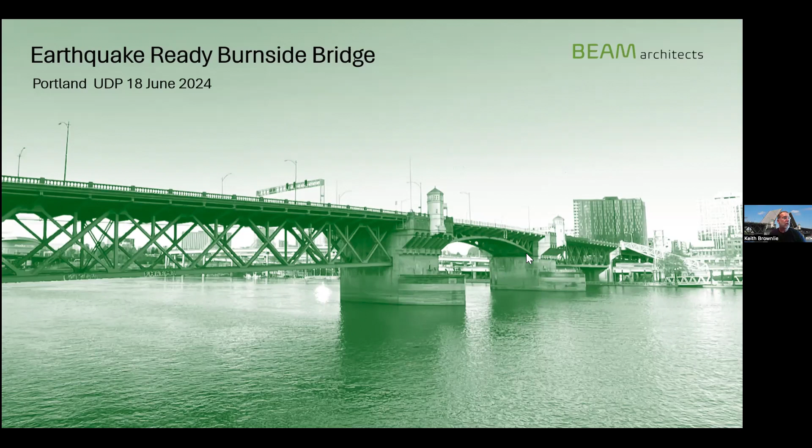So without further ado, the CDAG's focus has largely been about the east side span. There are 2 reasons for that. Irrespective of what happens on the east, largely the rest of the bridge is the same or similar, and also the long span bridge is visually the most significant aspect. It will be the piece that defines if someone in later years says, 'Oh, the Burnside,' and everybody will say, 'Yeah, the one with the,' but the 'the' is yet to be determined. We've done a lot of work, and there are still options on the table, and there's a process that will be explained about how to get your opinion on those.

I'm just going to take you through where we're at. Nothing has changed insofar as those 2 generic types: a cable-stayed bridge at top, or a tied arch bridge at the bottom. I'm going to go into ideas of scale and architectural niceties, and not-so niceties that go with that, but note the scale differential. I'll come back to it.

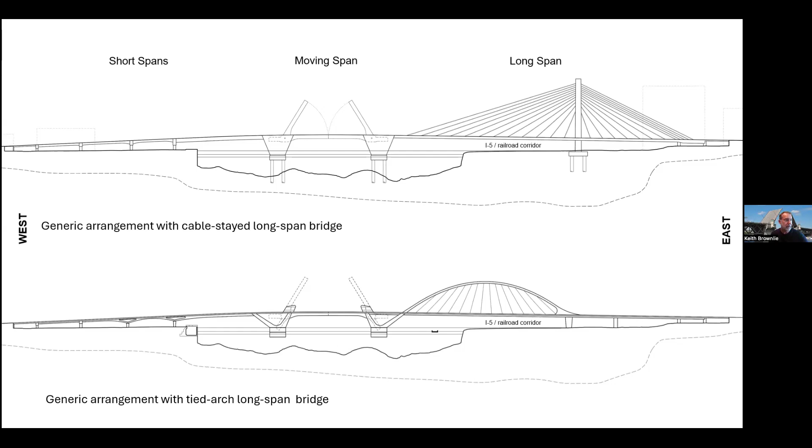This slide was designed for that other forum inhabited by non-professionals and non-construction professionals, just to get some technical input into the difference between those 2 types. They are very different—they do the same job, but they're very different pieces of structure. A cable-stayed bridge involves a singular point of structure, a tower or mast, from which cables are strung to support a deck. That deck is in compression, the tower is in compression, the cable stays are in tension.

Conversely, a tied arch differentiates itself from a thrust arch, where in a thrust arch all the load goes down to ground. In a tied arch, a bowstring arch, that load is resolved through the deck—it's literally like a bow. It's got an arch rib in compression and a deck in tension, and the deck is suspended between. So they have very different structural outcomes, and the key takeaway is that the arches rest much more heavily on the in-water pier, whereas with the tower, nearly all the load goes down to terra firma—at least it would, if we had any terra firma. We have terra not very firma, because it's within the liquefaction zone of that side of the Willamette.

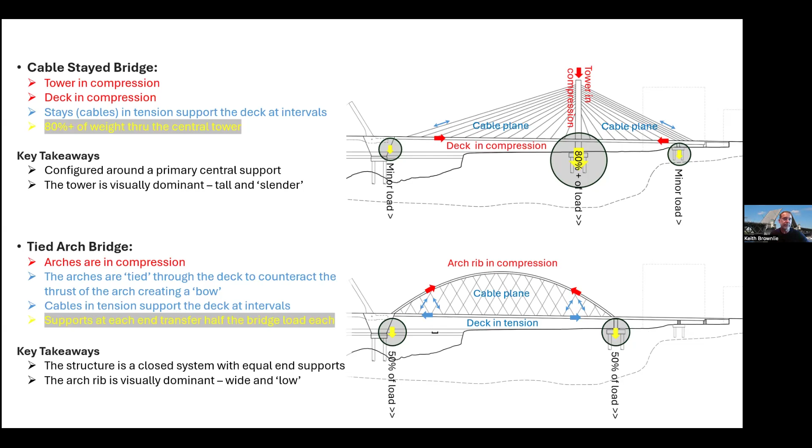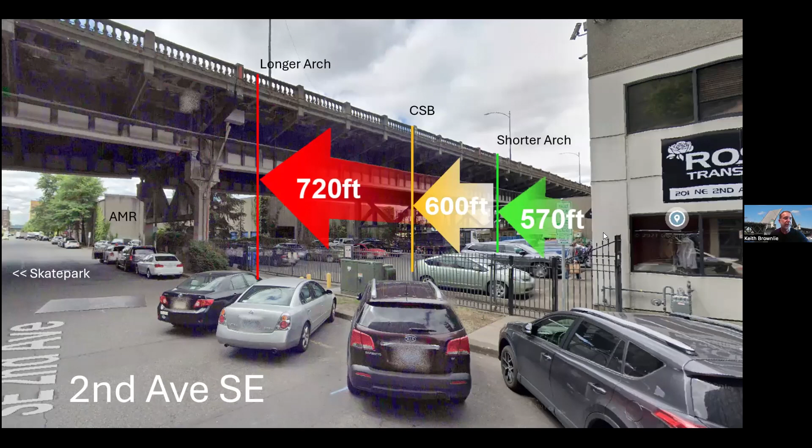So it's a deep foundation. That said, I'm going to come back to this, but just so you know—you're probably all very familiar with the site—this is looking south on Second Avenue Southeast.

Ignore the large red arrow in the foreground. The cable-stayed tower will be somewhere in and around this 600 feet zone, and the arches will be in and around this 570. The skate park's off to the left-hand side, and just down to the right would be the Union Pacific Railroad and I-5 corridor. But within that hinterland, that's where the bridge lands on its east side.

This is the AMR down here. I'll come back to it, because there are some other iterations that are slightly longer, which is why it says longer arch—I'll show you those. So the generic types: cable stay, tied arch. The more specific types within those generic ones are labeled out here.

I'll come back to show you those in more detail, but there are 3 types of each. Essentially they're the same thing, but there's a great difference in profile, little difference in construction methodologies, and a little difference in cost, but these are all still very much on the table. So you have the goalpost tower on the top left, the same thing but with those towers leaning out in the middle, and then an inverted Y configuration with the top of the tower over the center of the highway on the top right. In all 3 cases, the arches are on the outside of the deck, a pair of arches, either vertical with no bracing, leaning in with bracing, or vertical with bracing. Those are the generic typologies.

I mentioned earlier, let me go backwards to that last slide you saw. The difference here, these are looking east, so you see there's a pair of piers in these 2 scenarios. But these 2 types in particular, within the reachable cost range, could knock out this foreground pier and just have the pier just to the west of Second Avenue. So that red arrow on the earlier slide that I asked you to ignore, I hope you didn't, because that's where the longer ones land just shy of Second Avenue Southeast.

Why does it matter? Well, it probably doesn't, but that 50 feet extra length of span equates, if you're using the same aspect ratio, to 20 feet additional height. I'll show you later, but essentially there's a discussion about scale in the city, which you'll all be very much aware of. It's not to say we can't make the arches at any length 20 feet higher, it's just that that's what would happen if you lengthened it. Personally, I think there's not very much value in doing that.

So here's some words you probably use all the time. These words went to the CDEG with an explainer, and that explainer probably complicated rather than simplified or clarified things. But in essence, these are some, but perhaps not all, of the architectural and urban design discussions. There are other ones about cost, constructability, schedule, seismic resilience, and so on. But from a design perspective, these are some of the things we're looking at.

The list is designed to do 2 things. One is to say it's not as simple as looking at 6 options and saying I like that one, because they do not respond to all of these criteria in the same way. Some may have a more urbane response to some views, for example, while others might rise to the top in others. So there's a complexity within it. That's point one. The second point is that this list started life just to make my first point, but seems to have evolved into being one of the questions going into the online open house.

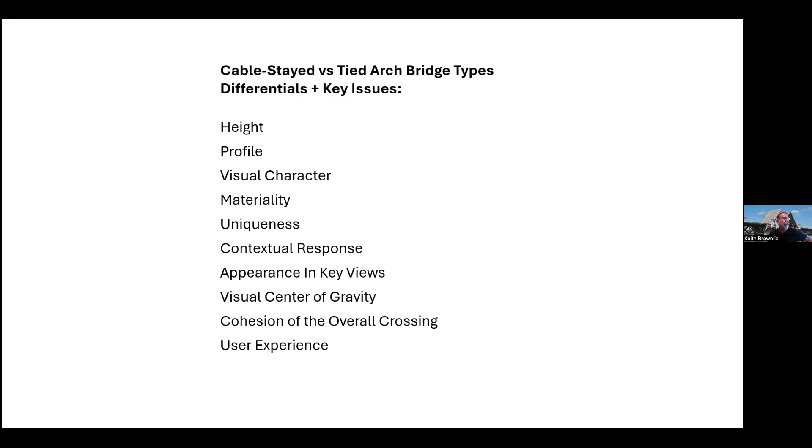So these words, which you will understand, it's my belief they are going to go in some respect to the public, so it's worth holding that in mind. I won't run through all of those, but some are self-explanatory while others merit a bit more drilling down into. The first one, I've got a banner across the top so I don't know what it says, even though I wrote it. It probably says height. Let me see if I can move it. I can't.

This is a large structure, and it's a large structure not only in the city, but absolutely on the pivotal spine of the city, so it will have an impact. The very kind of analog analysis of this says, well, look, cable-stayed bridge towers are by definition taller. So we're looking at something like 290 feet above the ground, and about 130 feet for the arch. But if you add that 20 feet in for the longer version, maybe 150 feet.

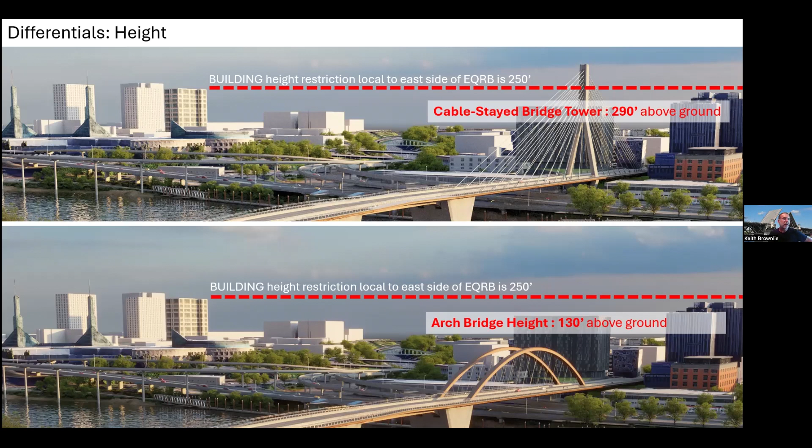We're using that metric above ground rather than above a datum, just to give you some kind of local context from these tall buildings that anchor the east of the site, but also to give you height context. The cable-stayed bridge, for example, at around 290 feet, and who knows, it might be 270, it might be 290, but there's an efficiency game to play. So the variation is about making it work in an optimal sense rather than an architectural want.

But I'm kind of interested in the steel bridge very close by, 260 feet, 290 feet, so we're just poking our head above that particular parapet. You're familiar with all of those structures, and I suppose in psychological terms the Tilikum would be the most comparable. That 180 feet, I think, is from the ground. So just as a comparator, we're a much taller structure because we're a much longer structure, but we have one tower only. Most cable-stayed bridges would have two towers, as the Tilikum does.

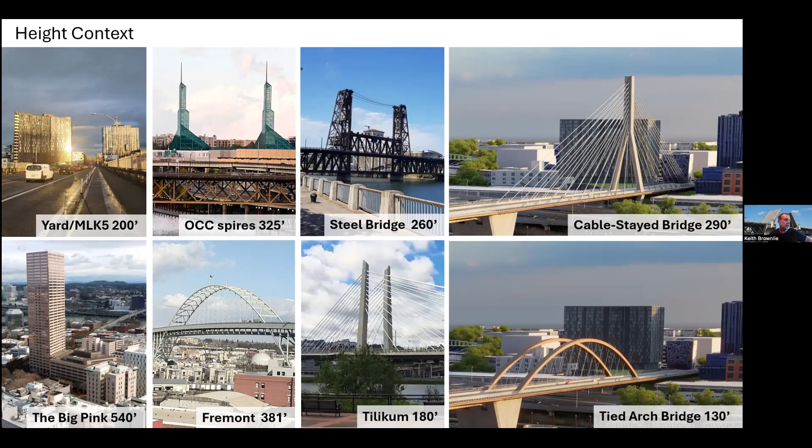So another differential is materiality, and this is essentially a given. So the cable-stayed tower will be a concrete construction, and all of the arch versions will be a weathering steel construction. Just to add in that the deck superstructure, the framing of the deck, will also be weathering steel. So the arch versions are a kind of matching suit of weathering steel, and the cable-stayed bridge will be a compendium of materials, but certainly that standout piece in the tower will be concrete.

And you'll all know that comes with baggage. It comes with a considerable onus on the weathering steel side to detail it to avoid rust spillage onto other surfaces. So waterproof detailing is hyper important. And on the lighting side, obviously weathering steel is a matte finish, so ambitions for architectural lighting need to be considered quite carefully, because the absorbency is higher, the reflectivity is much lower, and so on.

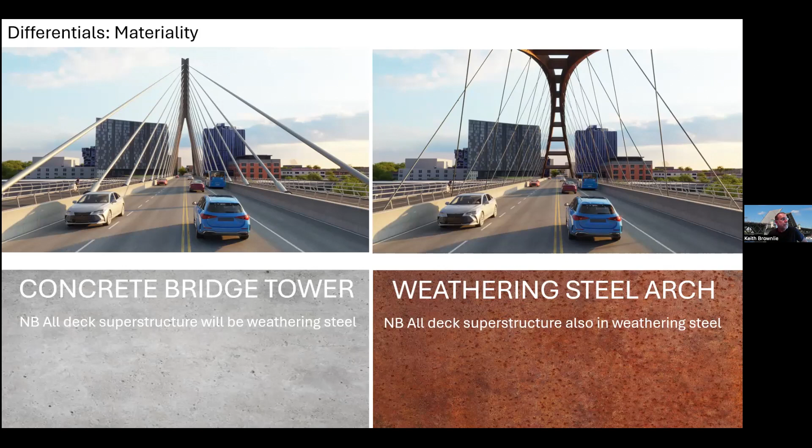Another differential, well, this is not between the cable stay and arch pieces per se, but it is between the subtypes. I don't know whether it's important to you. I don't actually know whether it's even important to me, but bridges are a very, very constrained typology. The first thing we ever have to do on a project when someone says this must be unique is gently explain that it's not going to happen, because there are only 6 bridge types and a limited number of subtypes within each. So it's a limited pool.

But of course, in the context of any city, what you're trying to do is make it the best fit within the urban context. So do you want a unique structure in Portland is a credible question. Do you want a unique structure is not a credible question. Obviously, the goalpost tower you already have. That's what the Tilikum is, albeit there are 2 sets of goalpost towers, but you already have one. You know what it looks like. The inverted, well, oh no, sorry. The labels on the diagrams are above, and confusingly, the photographs are labeled below, just to keep me on my toes.

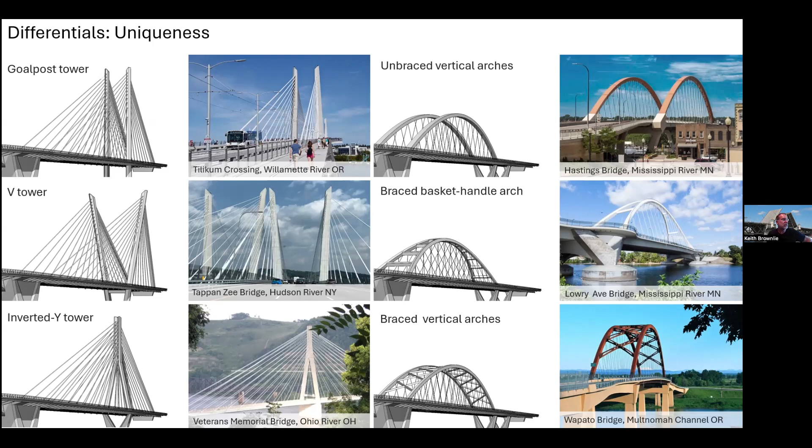So this, I think, is important. The two bridge types are spanning exactly the same length, within a few feet, and they're spanning the same obstacles. They're spanning the I-5, the railroad corridor, connecting back into the land, and stretching out to reach the first in-water pier over the river. But you can see there on the left-hand side how very different they appear in the landscape.

So in this view, Burnside is on a bend in the river, and it straightens up as it goes to the north. So if you're looking south from the centre of any of those bridges, from Fremont or Broadway or Steel, you see the cable stay bridge, bottom left. You see the tower over the land. You don't see the centre of the river bridge; you see a land bridge. So that scenario really draws your eye eastwards, whereas the arch draws your eye westwards.

So if you then concentrate on the two images on the right, the arch ribs reach in and connect very visibly, because the arch rib is a horizontal, albeit curvilinear, form, and the cable stay is a vertical form that's recessed very far east, and the only thing that connects into the river is the cable plane. Those cables are very thin relative to an arch rib, and they're very far apart. So they have legibility, but also transparency.

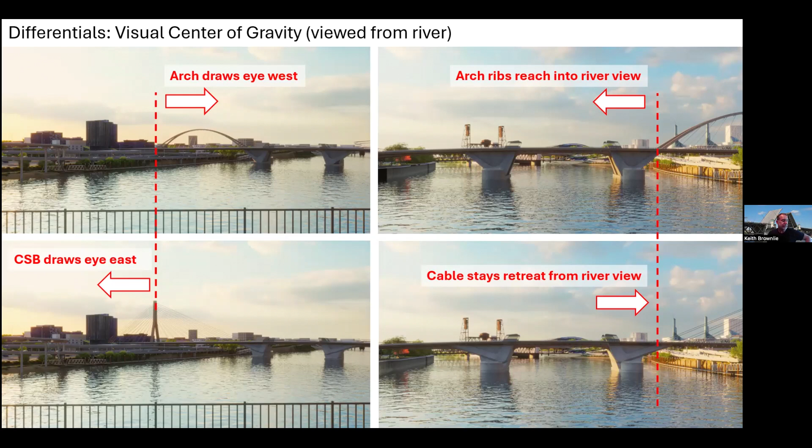And what's happening over the land is this. So, to put my cards on the table, I think the arch rib reaching into the in-water pier is a challenge visually, but it redeems itself as a type in this scenario. So I-5: the images on the right are running north on I-5, and the images on the left are running down the on-ramp onto the southward highway.

But you can see that the arch addresses the highway corridor. It says, "I am a bridge of the land," and okay, it reaches out over the river, but its center of visual mass, its center of gravity, is over the highway. I think these images are taken a little high, but from the driver's point of view, you have almost no cognition of the river in that position. You're just looking down the highway, and this bridge addresses that. I'm not saying that the cable stay doesn't, but it's a much more subtle reaction to the highway.

Whether, of course, that is the right place for a gateway structure, which the arch most certainly is, is a debate. But my take on it is this: it's not a gateway from one place to another. It's a marker for what is the pivotal spine of Portland. So as you come under it, you can't fail to notice that you're passing under the Broadway, the Burnside corridor.

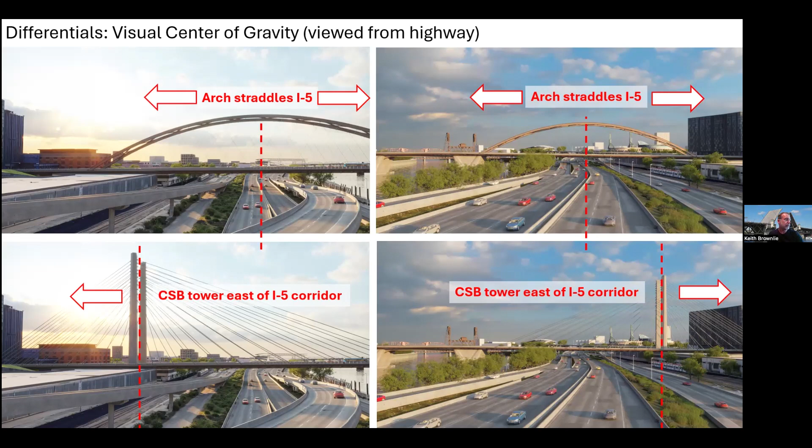Well, interestingly, I don't know what that says at the top because I have a band in front of it, and I wasn't expecting to see this image, but I think maybe there's going to be a red line. Yes, here we go. Look at that beautiful red line.

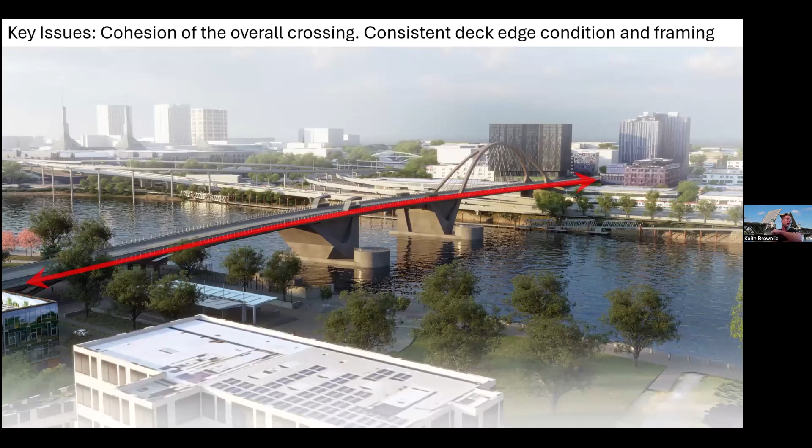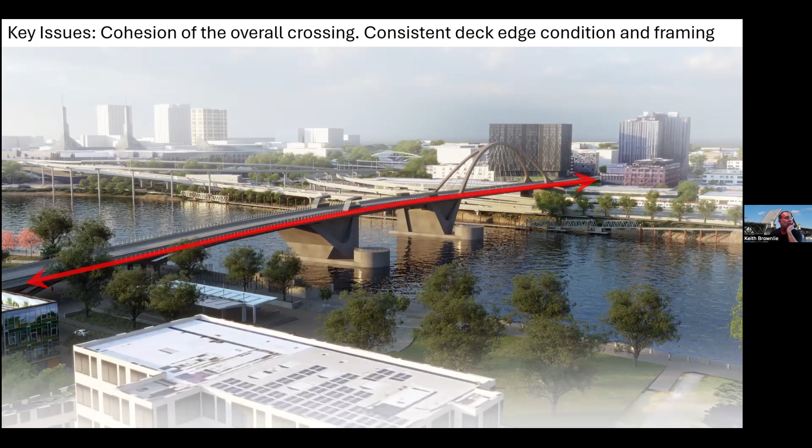So this is a key issue rather than a differentiator between the types or the subtypes, but on all types, one thing that we're trying hard to achieve, relative to the status quo when we arrived on the project, is to bind those three parts, the east long-span bridge, the river bridge, and the western approaches, together by continuity of deck edge. It's absolutely critical that edge is continuous and cohesive. It currently is, which I find very interesting.

In modern bridges, with apologies to all the engineers on the call, bridge engineers tend to want to put the longitudinal structure as close to the edge as possible, and then have the cantilever as small as possible. But what that gives you is a very thick edge, a very thick visual component that defines the bridge. Whereas if you recess the longitudinal structure as far back as you can and cantilever the footway, in our case the bike and footway, you get a thin edge.

And you do read the foreground edge much more. These aren't the best images to say what I'm about to say, but recessing the longitudinal structure into shadow is an immensely powerful device. So currently you have consistent framing end to end on the Burnside, and we aim to replicate that.

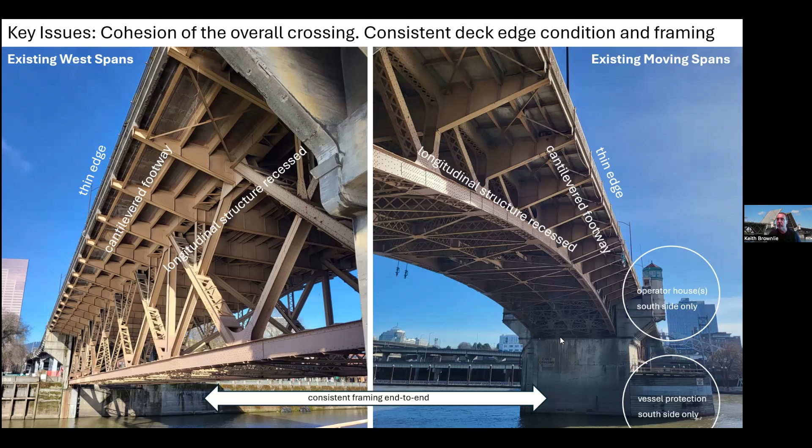There are another couple of things, as you can see down there on the bottom right. We have two operator houses on the south, one on the southeast, one on the southwest, either side of the moving bridge. And we have vessel protection on this side only. Both of those things on the existing bridge need to be replicated on the proposed bridge. We don't know what those are yet. We've designed our way around that particular debate very many times. So take these as placeholders.

There will be something on the south side in front of the in-water piers that stops vessels hitting the bridge. It's a strange anomaly of the language of bridge design, but also the attitude of mariners, that these are not to protect the bridge from the vessel, they're to protect the vessel from the bridge. So these are vessel protection.

The other thing here, what you don't see, is the operator houses on the outside. We don't yet know whether they will be or not, but our ambition is to take them inboard so that we can maintain the continuity of the deck edge, the continuity of the framing with the cantilevered footway and the thin edge, as opposed to the thick edge of a longitudinal structure, uninterrupted by the op houses. We'll see.

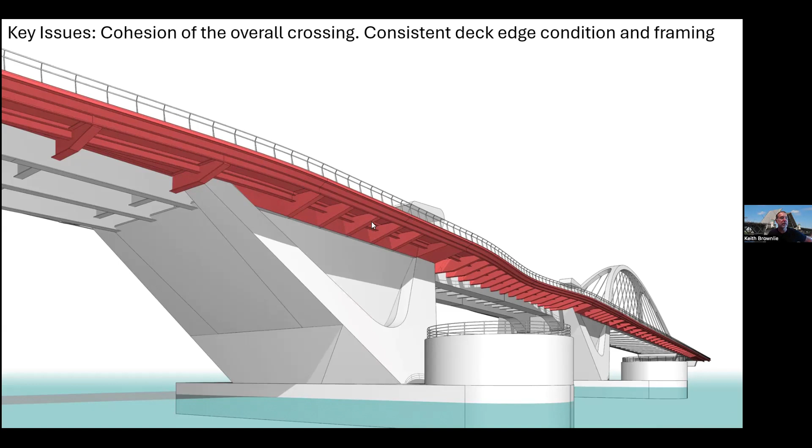So we are back to these types, which I described in rather scant detail previously. But I mean, 9/10 of bridge architecture is profile, and these all have a different profile. Well, they all have a different profile depending on where you're standing.

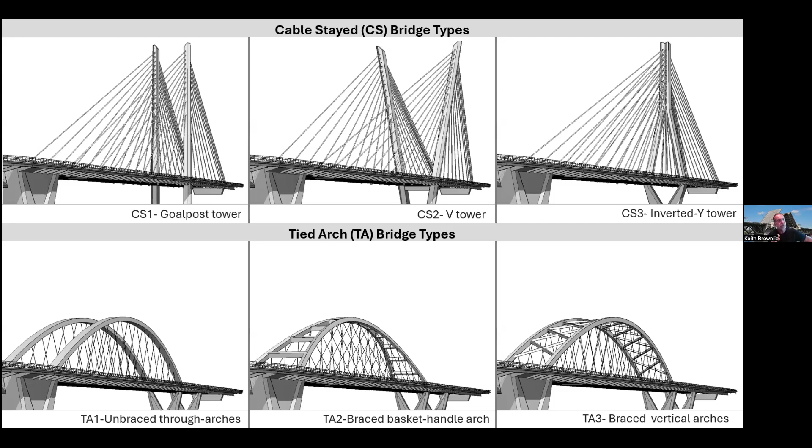So we have a relatively sophisticated CGI model. We are currently running some video of these types from those. Those are not ready yet, but they will form part of the online material. But what I can show you is these 6 options from various strategic viewpoints. You can make your own mind up what you think has power and whether the volume dial is turned up too high or too low on these particular options.

So obviously the scale differential is the most immediate thing to notice, and perhaps actually the lack of difference from very many viewpoints of the arches. They are very similar. Whereas kicking a cable-stayed tower by a few degrees of inclination makes a significant difference to its demeanor.

So this is a view that none of you will ever get, I'm guessing, but as an overview. One of the things to note on this, incidentally, is how the big pink sits just off of that corridor. One thing I quite like about the cable-stayed versions is that there is this conversation, this kind of bookending. Previously perhaps the Yard and MLK5 would have done that bookending, but there is also a kind of interim conversation between the cable-stayed towers and the big pink, which doesn't occur in the arch versions.

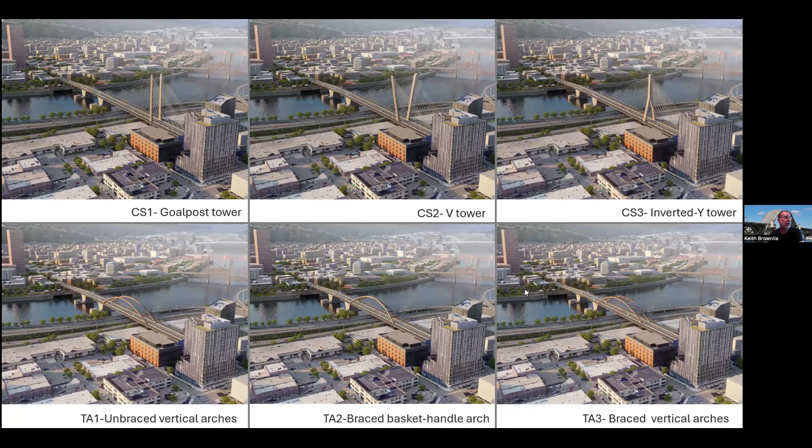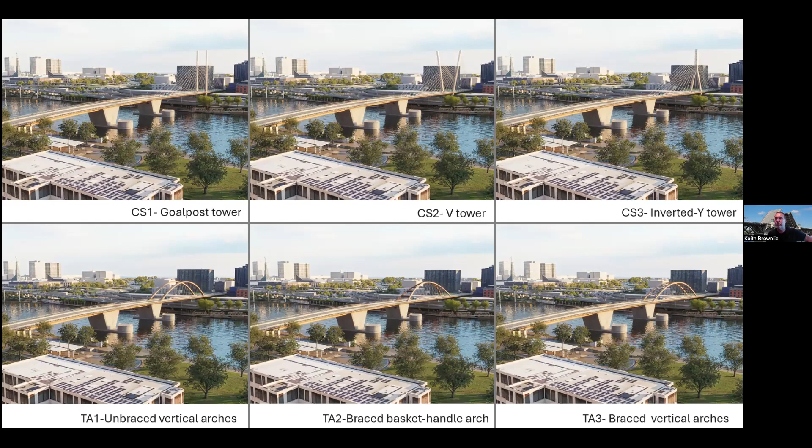So there is also a relatively unachievable view. There might be some buildings here, but unless your office window's there, you're not going to see it. But from this side of the town, and we'll drop down a little bit more to have a look, you can start to see that it doesn't matter what you put on the east, or well, it does matter, but its significance is lesser than what's in the foreground, because by virtue of having these two bascule lifting decks, you have very significant in-water piers that define the foreground, and whatever you have in the background is relatively light, despite its scale.

So this is from Tom McCall Waterfront Park. The bridge, obviously, in each case, spins off to the left-hand side across the park and into Old Town. Depending on your viewpoint, there is a sort of scale from boring to exciting, or choose your own adjectives. Or perhaps it's a question of politeness in the urban context.

I'll leave these up for slightly longer than I'll talk, because you need to take them in, but we can come back to them in a Q&A. There are 6 or 7, and we're only 3 or 4 from the end.

So here we are at I-5 again. I've said, I think, all I need to say about the difference between the cable-stay and the arch versions, but I'll also point out that, choose an arch, any arch, and they're largely indistinguishable from these profile views, whereas you do continue to notice the difference in the cable-stay tower layouts.

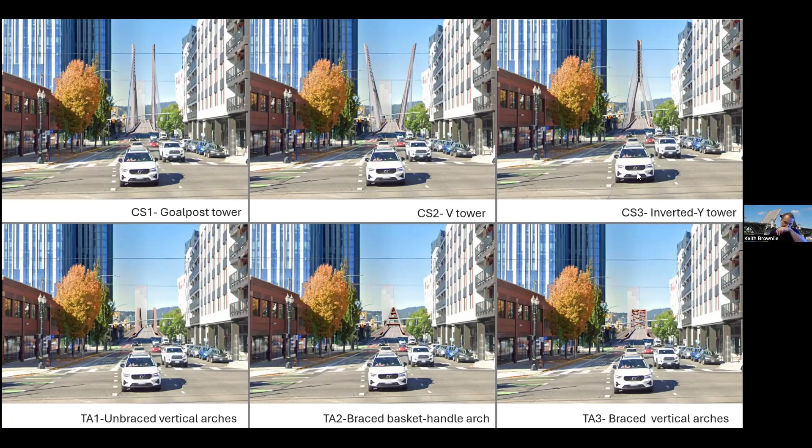And there is the last slide. I'm under some heat for not being entirely fair by ending on what I would say was an architectural preference. But I had to end on something. I think it's rather a good image. But I'll tell you what's wrong with it. These barriers, which are concrete, are not correct. Those will be open steel, three lines of structure, open, so have a much more airy, light feel. So I don't know how long I've taken. I don't know whether I've explained it well, but the floor is yours.

Well, thanks, Keith, for that presentation. We've got about 15 minutes left, and we've got a few questions we can lead off with in discussion. If you think of any, put them in the chat, and we'll get them on in the dialogue here. Fiona leads off with a question about the design review process in addition to the CDAG. Does this go through the City, Portland Design Commission, or other bodies of review? And then Megan. Yeah, I can take that one.

So the process is essentially we will be working through July to gather input and feedback from the public on this range. We will be taking that feedback back to our Community Design Advisory Group. They will consider that feedback as they make their recommendation on bridge type in August. We also will be sharing with that advisory group all the feedback we've heard in our briefings. So this is an example of a briefing. And then the recommendation from the Community Design Advisory Group would go to the project team, which is balancing a number of criteria as we march towards making a decision.

So it's a mixture of community input on bridge aesthetics, cost, schedule, risk, impacts to stakeholders. We'll be taking all that into consideration when we make a recommendation to the Board of County Commissioners, and ultimately the Board of County Commissioners will decide, and there is opportunity for public testimony at those board meetings. So that's the process we have laid out in a nutshell. Okay.

Thank you, Megan. We've got a question. I think you started to address it in the slide. Keith, how much importance do you give to the experience in crossing the bridge to vehicular, bike, or foot? So the differences in modes. And the question is an anticipated animation with that view in mind?

Do you want me to take this one, Keith? Or I do. I want you to do all the work from now on, James. Okay, fair enough. So yeah, well, we are thinking about the experience for all bridge users, whether you're on the bus, in a car, on a bike, or as a pedestrian.

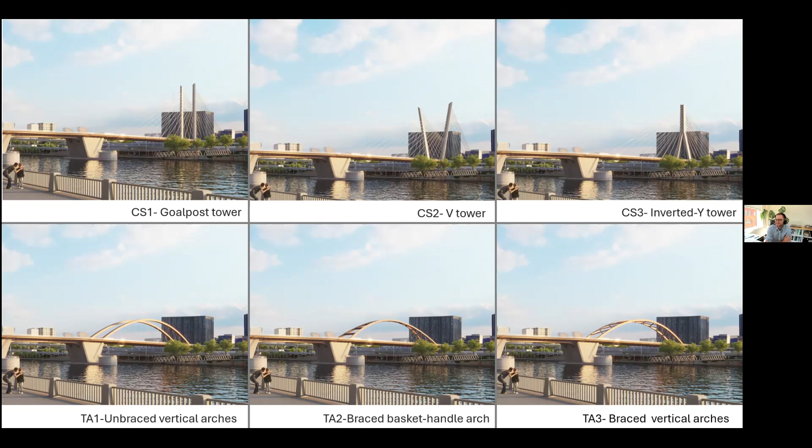Continuing on, I think Megan, you had addressed this, but I think the question is if there's no center median planned. And I think a lot of it has to do with the cross-sectional demands of the bridge and the width and cost. I don't know if there's any specific follow-up on that.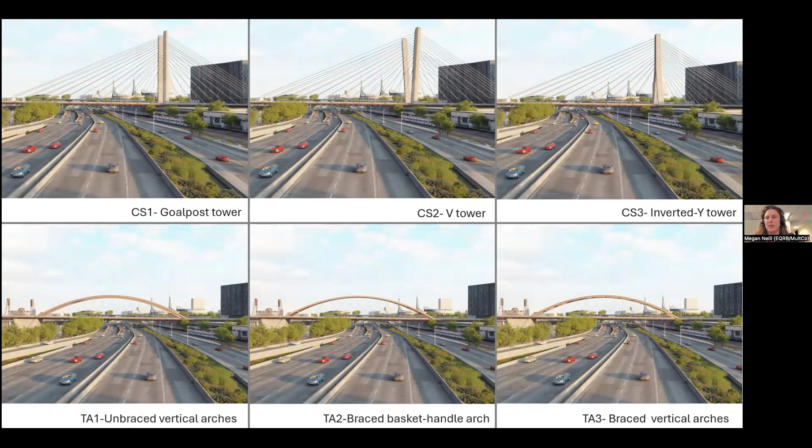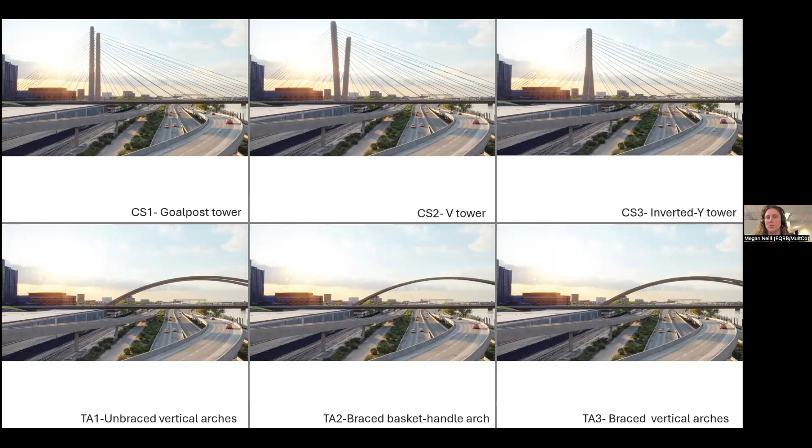Just that we want to make sure the deck is as flexible as possible for any future use, or sometimes when you do some temporary work, you need to close a lane and divert people to adjacent lanes. So having a barrier there would really limit that flexibility. So we just want to ensure that we're not encumbering any use of the bridge in the future.

Thanks. And then also following up on that was a different question, but thoughts about bridge lighting. It's a thematic element in our city. And is there any considerations? I know, Keith, you mentioned the different bridge surfaces are going to reflect or not reflect differently, but is that to come, or is there thoughts incorporated in the process so far?

So we are definitely going to be thinking about bridge lighting. As it stands at the moment, that process hasn't really begun, although having said that, we are thinking about how we integrate the lighting that we know will be there, the functional lighting on the bridge. So we know we're going to have light poles. They're not on these images yet, but they are in process.

And one of the things that we're quite keen to do, Keith talked about the continuity of the deck edge. What we don't want to do is have light poles on bump outs on the outside of the bridge, because for us, it's about the line of that trajectory of the outside of the bridge, and light poles will start to break that up.

So we're keen to push the light poles into the median between the highway and the cycleway by making that curb slightly wider. And what that will do is, when you look at the outside of the bridge, you will still get the continuous line of the deck edge, and it won't be interrupted by the light poles. So that's the functional lighting.

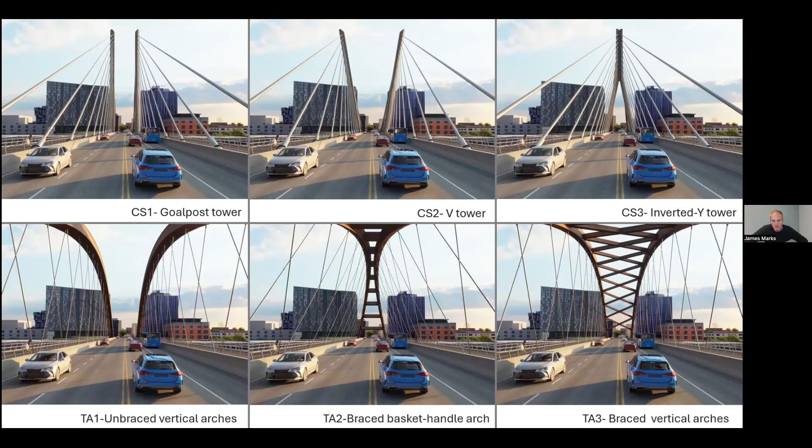Well, they are similar in terms of type, but of course the Tilikum has actually two towers over the water, whereas we're proposing half of that over the land. We haven't done an analysis to see if you can see them from each other, but I guess it's really a question about whether we want some sort of harmony between those two particular bridges, or whether we want something more unique, and whether the Burnside should make its own statement and react to its own site and the particular constraints that it has and overcomes. But more about a city context relationship than maybe one from another.

And then we got two more questions. I think, Steve, you may have started to answer this one about the bridge height over the water, but there's a question about the tides and if that's been considered and if the fluctuation is big enough to be recognizable. Yeah, we have been considering tidal influences, but more significantly the flood elevation, 20-year, 50-year, 100-year, that really affects the design as being considered and is frankly overwhelmingly greater than the tidal effects.

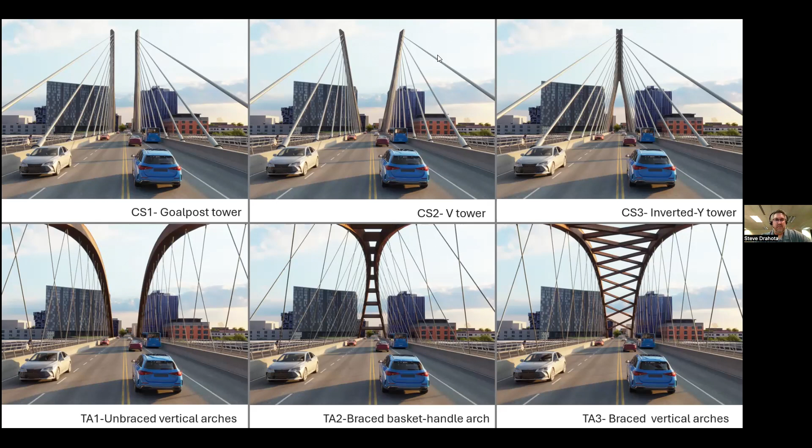So we are embedding that into that process. The scale of those in-water piers has a direct effect on the hydraulic impacts that we're having, and so there is a constraint around sizing to avoid a water surface rise for the various flood events. So all of that is in consideration as we're going through these steps. I remember the '96 flood and walking out towards the steel bridge and the floating logs hitting the bottom of the steel bridge. So yeah, that's a big deal.

Lastly, I think we have maybe a moment for one question. It's 1 o'clock, so if you have to leave, please do. But the question here is about the control towers. It says bridge operations—can the control of the bridge be handled via cameras remotely instead of having manned control towers as part of the design? And I guess with the bridge lift, are they required?

I can speak to that. So whenever we open the bridge, we always have operators on site. So while you may not see operators there every day, we get call-outs in advance and we can staff the bridge accordingly. The Hawthorne Bridge is always staffed 24/7. And while you can operate the bridge remotely using cameras, we find that in Portland it's just safer for the public if we have someone there on site who can have eyes on the traveling public. There are a lot of situations where people don't really follow the rules, so it's great to have someone there to say, hey, could you please get off the bridge or continue on. It's overall a safety priority to have someone there when we operate the bridge.

Thank you. And there was a question about the seismic design in terms of its capability. This is Earthquake Ready Burnside Bridge, so I think that's the front and foremost purpose of the bridge—to be around after a potentially cataclysmic seismic event. So I don't know if there's more to address or if that's on the website, but I do want to—Steve, you took yourself off mute.